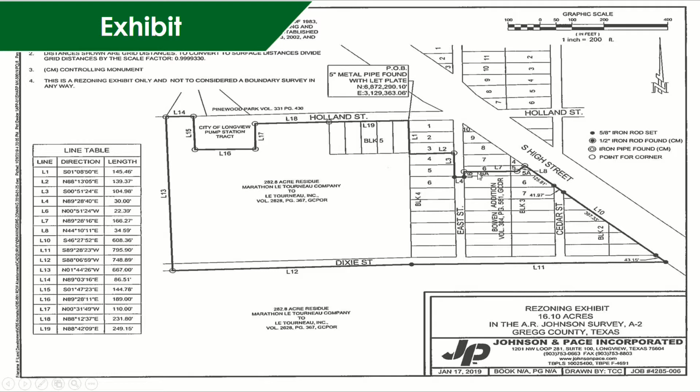And this is the area on the map just south of Holland Street right there, and it's this area in the dark line.

Thank you. Is the applicant present? Would you please come to the microphone and give us your name and address, sir? Carl Kuenemann, address is 2400 MacArthur here in Longview. Thank you. Tell us about your project, sir.

Project is Komatsu. Y'all should remember almost 2 years ago we lost one of our buildings in a tornado on Memorial Day weekend. So we finally got into a place where we started collecting properties, and now we want to put the properties we've bought into compliance with zoning of what we pretty much do on the facility across the board. So there was a few lots that we had to purchase in this area, and we plan to construct a new building starting later this year in that area.

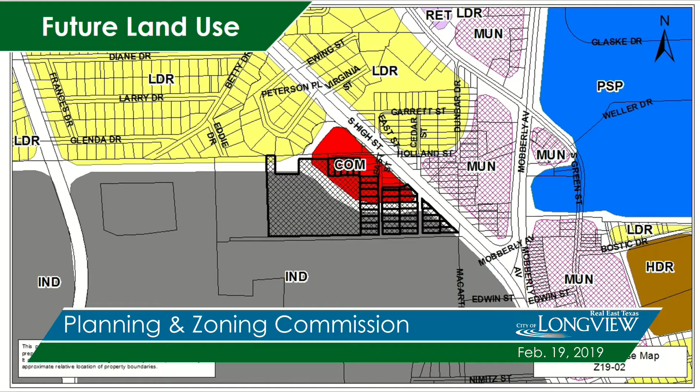Would you spell your last name for me? Kuenemann. Kuenemann. Nemann. Thank you.

All right. Any questions of the applicant? Hearing none. Thank you. All right. Staff?

The applicant is requesting to rezone approximately 16.1 acres as previously stated. This portion of South High Street is maintained by the City of Longview and is a principal arterial. These roadways serve major centers of metropolitan areas and provide a high degree of mobility. They are designed to serve relatively high traffic volumes, have high operational speeds, and serve a significant portion of through travel. This type of development is appropriate along this roadway as long as access management is followed.

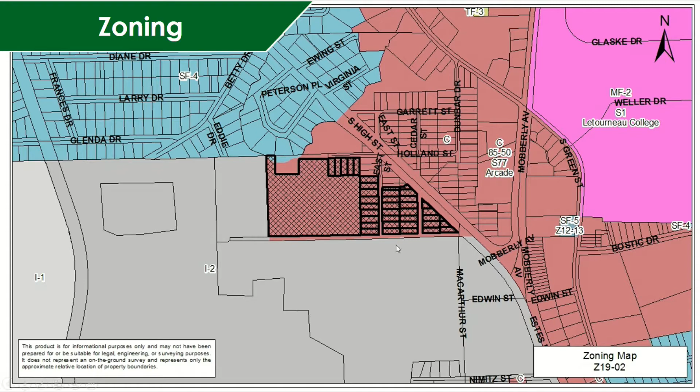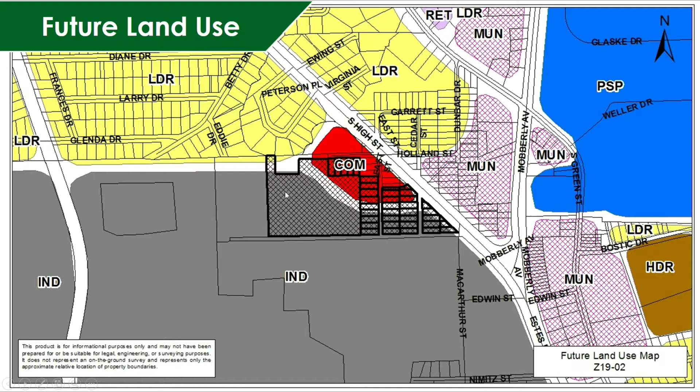As you can see here, this was an area that was originally platted as probably residential small lots that were going through the abandonment process for some of these rights of way. As you can see from the future land use map, it does designate this area for this type of use. And there's all the lots again.

As you can see here from the aerial, a portion of that area is already being used for part of their process. As stated, they're going to be doing some additional growth out there based on their growth in their business. So I'll be happy to answer any questions.

Michael, what's going to happen to those 7 lots on East Street? No, you've got 7 lots outside the box, the ones with the buildings on them. Those are not part of the rezone. They'll just continue under the current zoning, which is commercial.

I believe there is an auto repair facility in the corner tract. Those are properties that Komatsu does not own at this time. But there's no residential in there. No, I don't know that it was ever developed for residential. It was just platted that way.

And of course, Holland doesn't go all the way through. It stops right there at the credit union at their driveway. So the majority of it is an undeveloped wooded area that's never had improvements, no right-of-ways or anything that I can tell.

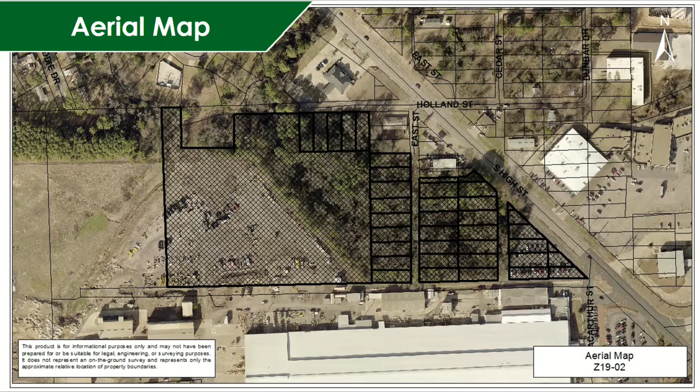Is that area paved? They have the outdoor area that they're using. I don't know that it's paved. I think it's all just crushed limestone, gravel. It's a slag top on top of mud. Is that down in the lower left, is that what you're talking about? That's where y'all practice? No, that's south and west of that, closer to the loop. Okay.

Any other questions of the applicant? I'd move for approval. Second.

Just a moment, thank you. Let's hold that just a moment, please. We now must go to the general public. After staff comments, we go to general public. So is there anyone in the audience that would like to speak in support of this request? Hearing none, is there anyone that would like to speak in opposition of this request? Seeing none, the public hearing is now closed and will open for a motion.

Move for approval. We have a motion and a second. All in favor? Aye. Any opposed, put the same sign. Motion carries. Thank you.

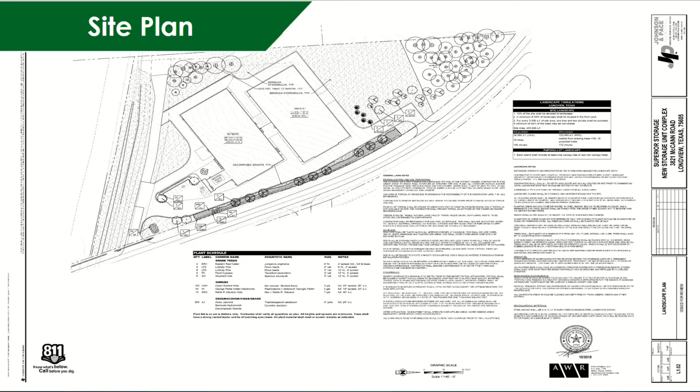And then the question about the number of shrubs - there's a significant reduction, for two reasons. The original landscape plan compared to the proposed landscape plan will tell the story. When we were anticipating developing the entire piece of property, having 5 buildings plus the detention pond, we were proposing to have the fence extend along the entire frontage of McCann Road, because it was also going to serve as a security and buffer around that detention pond. So we had shrubs planted along the entire length of McCann Road.

Now that we've condensed the site, we're impacting about an acre less of the site. We've reduced the number of shrubs because we're not developing along the entire frontage of McCann Road. Alright, any other questions of the applicant?

Show me where the wood fences are now versus where they were. So the requirement to install wood fences, that would be your buffers between this property and residentially zoned property.

Correct. So looking on the plan that we have on the screen, there's a shaded area on the left-hand side of the page. We're proposing to install a fence - basically it runs along the gravel drive that's there, which is what CenterPoint and Enable use to get to their compressor station. That's on the apartment side, yes, sir.

So the other fence that would be required to be installed, if we were to develop against it, is against the floodplain to the west. This is about half of the property - let me reference the drawing on the screen. Go to the aerial, would that be better? Aerial would be handy, yes, sir. Okay, so north up the page, you can see the compressor station, which is just west of our site, and then a bunch of trees between that compressor station and Spring Hill Cutoff.

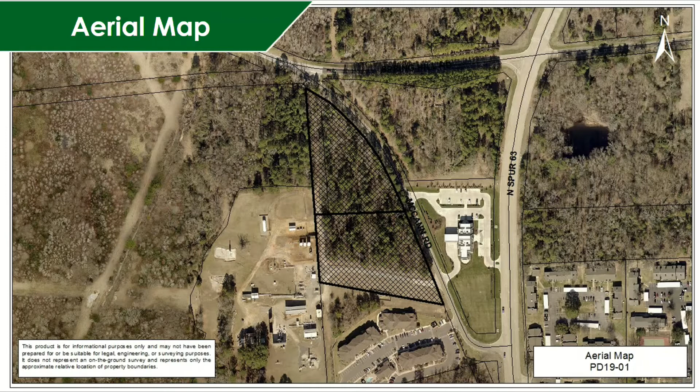And then the other one will be on the south, approaching Amberwood. Yes, sir. Of course, the intent of those fences is to buffer non-residential development from residential zoning.

Anyone else? What is this, just because I'm stupid - PDGR to allow for a bank development stipulations, is that what we're discussing? Yeah, that's where the, that's BTH Bank. I'm just reading it and making sure, because - yeah, that falls under PD 15-01, which is for across the street. This is PD 1803. I'm just making sure it wasn't part of this. I didn't think there was any room.

Will there be any future development in the northeast corner, where it says PD 1803? You're keeping the trees, but since you condensed this, is there a possibility for you later to build an additional building? Are you leaving that open for future development?

We're not leaving it open for future development. What we're proposing to develop is basically what the market will bear. Right now it's our understanding the market will bear about 100,000 square feet of storage, so those two buildings would provide that storage area. We're not proposing to build any other buildings, and we're not leaving space there to develop additional ones.

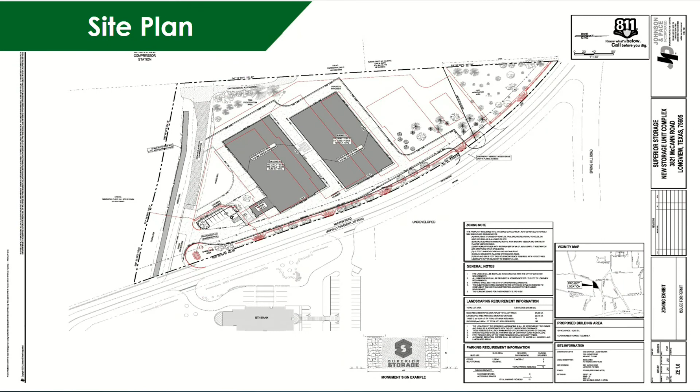Speaking to the buildings, one of the things we had before was single-story buildings with lean-tos on the side of them for the non-climate controlled. In this case, what we have now is there is no non-climate control. It's all climate-controlled storage. And the footprint of one of those buildings, it's a 2-story building, but if you look at it from the south, it looks like a single story. And if you look at it from the north, it has the feel of a 2-story, but it's kind of a walkout basement style construction.

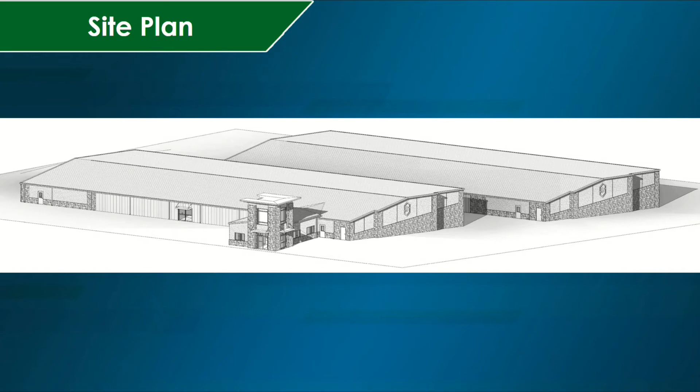Where, you know, 20-some odd thousand square feet of that storage is underground. 24,000 feet of footprint, yes sir, on 2 levels, on 2 buildings. Yes sir, and that gets you to give or take 100,000, 96,000 plus the office. Yes sir. Okay.

I believe I'm truthful when I'm presenting. We've truly compressed the footprint of what's currently zoned. So we're compressing that footprint to make a smaller footprint, clean the buildings up in their appearance, and provide 100% climate-controlled storage to match the market.

Before, you had to cover up, you were trying to hide each of the metal doors. Now you don't have that situation at all because it's all climate controlled. That's correct. Right now, for each floor, we have one main entrance in the middle of the building, and then 2 emergency exits, one on each corner, just to really clean up the look of that building.

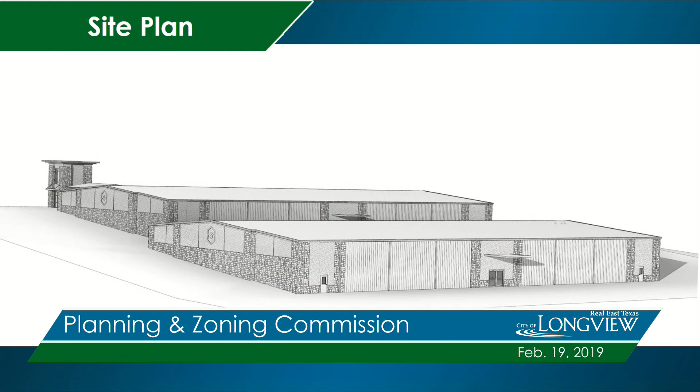Well, Jeff, I appreciate your answers. My biggest fear was that, A, you were underway, and B, the building wasn't sitting where it was supposed to be. And that seems to be an issue that we catch a lot. Yes. Why is this not where it's supposed to be? Yes sir.

Yeah, so, but thank you very much. Thank you. Any other questions of commissioners? Questions or comments? So it's my turn about -- sure, go ahead.

You know, I guess I led the charge on the fence last time. I appreciate what you've done in meeting with your neighbors.

When we approve this, Michael, if we were to make approvals, is it stated with all the shrubbery, all the additions of professional landscape, and all the notes that I've read that they would do, correct? Yeah, I mean, I know what you're proposing.

The fence is a big deal to me because we asked for it in the beginning, and there's fences on each side. The apartments have fences. I appreciate what you've done with it. That's go talk to your neighbors.

But to ensure that stays that way, with some kind of meat in the approval tonight, is there verbiage that we're going to make sure our landscaping is maintained and kept that way, so 6 months from now, the current owner decides to sell it, and the next guy never mows the yard again? I don't mean that bad, I think they're going to do a great job, but if the next guy comes, what do I have to protect the whole extent of this landscaping that we wanted to make beautiful for our city?

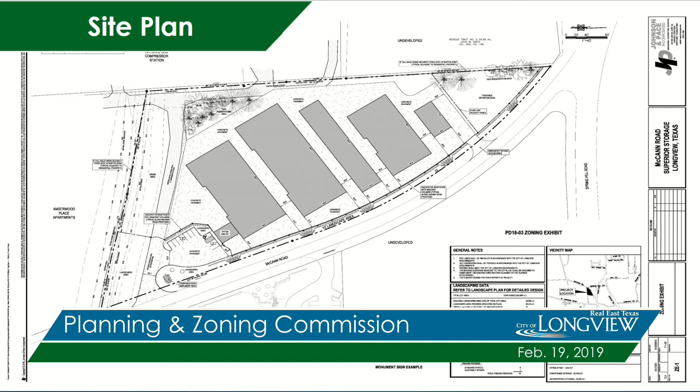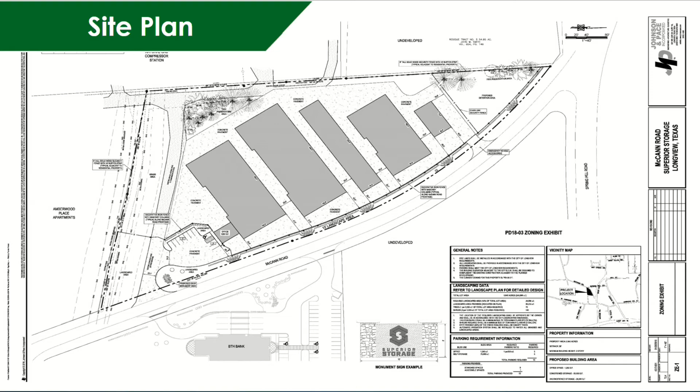I know y'all have it in your packet, but as we've talked about, amending PD 1803 to allow for self-storage mini warehouse. As stated, the original site plan showed 5 self-storage mini warehouse buildings with an office building totaling 72,000 square feet, including approximately 52,000 square feet of air-conditioned space and 20,000 unconditioned space. The new site plan proposes 2 self-storage warehouses with an office totaling up to approximately 100,000 square feet. Each building will be approximately 50,000 square feet, split level. Both buildings will include conditioned storage spaces.

The applicant is requesting to remove the decorative iron fence with masonry columns that was originally proposed for security. This is based on the security needs for the property changing, going from external entrance to each unit to more controlled internal access storage.

I think this answers your question. If a fence were to ever be installed along McCann Road, that fence would be required to be decorative wrought iron with masonry as proposed, but it would be an optional fence, not a required fence. So that wouldn't have to be an additional condition, it would be part of what's being proposed.

Michael, they wouldn't have to come back and get approval for the fence that way, but it would have to be masonry. Correct. So if P&Z and council approved what they're proposing tonight, they would not have to build the fence, but if they did build a fence in the future on the McCann side, it would have to meet that standard.

Thank you. And where that fence came from, I may have stated this last time, so when we were going through the initial PD development process with them, that was one of the questions staff asked: hey, are you going to put a fence? Because this is a very sensitive area, we were not real sure about self-storage. We told them, if you're going to do it and we can support it, it's going to have to match, it's going to have to look good, it's going to have to really fit in with your landscaping and everything. We said if you're going to do a fence, it's got to match the fence there. And of course, now we know, once we get a fence, we hate to give it up, obviously.